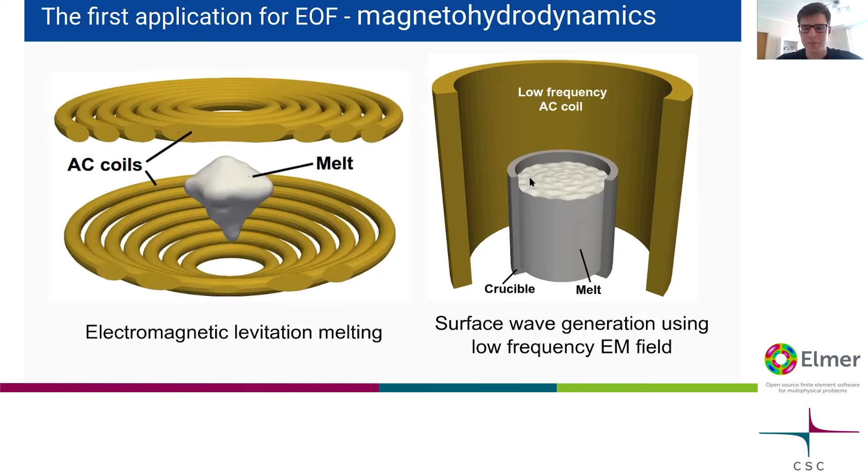When this goal was set, to simulate those types of problems, it was kind of clear what was needed. From a fluid dynamics viewpoint, we might have very high Reynolds numbers, particularly in that levitating case. As you also saw before in the pictures, liquid metal applications very often have a free surface, so there needed to be some method to cope with that as well.

And different material properties that are dependent on temperature, like viscosity in the liquid metal case. On the electromagnetics side, almost all problems are solved in 3 dimensions, including eddy currents. For that, the AV formulation is probably one of the best currently available.

Conductivity dependence on temperature: liquid metals, once they melt, have temperature-dependent conductivity. And the term V cross B is basically the currents generated when a fluid with velocity V moves along a magnetic field B. So there are additional currents and forces involved when such liquid metal flows in a magnetic field, and those currents need to be considered when solving electromagnetics.

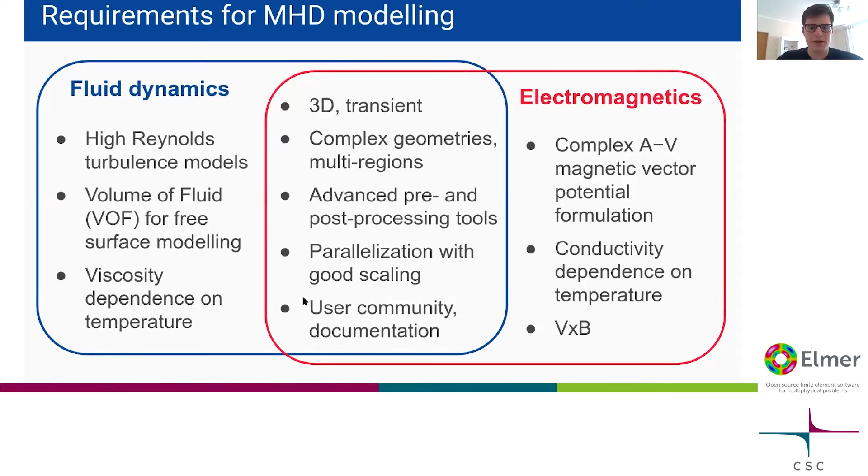What's common for fluid dynamics and electromagnetics: almost all problems are 3D transient with very complex geometries, and advanced pre-processing is very common, like generating complex meshes. Problems are quite large and difficult to solve, so parallelization is very important. And at the time when I started, user support and community were very important to me to consider, because there was no one else who could help me or direct me in which direction to move. So it's good to get pieces of information from other people.

At the beginning, it was clear that the right tools to simulate MHD problems were OpenFOAM and Elmer, because OpenFOAM is the most popular open source CFD software, and it has the capability to model high turbulence flows, and also has volume of fluid methods for solving flows with free surfaces. So that was a nice feature.

On the other hand, Elmer at that time when I started was quite capable to solve electromagnetic problems. Now it's much better than it was 4 years ago, but at that time it was enough for me. And what unites both softwares is that they are highly parallel software packages using the message passing interface to decompose and communicate between different processors across distributed data.

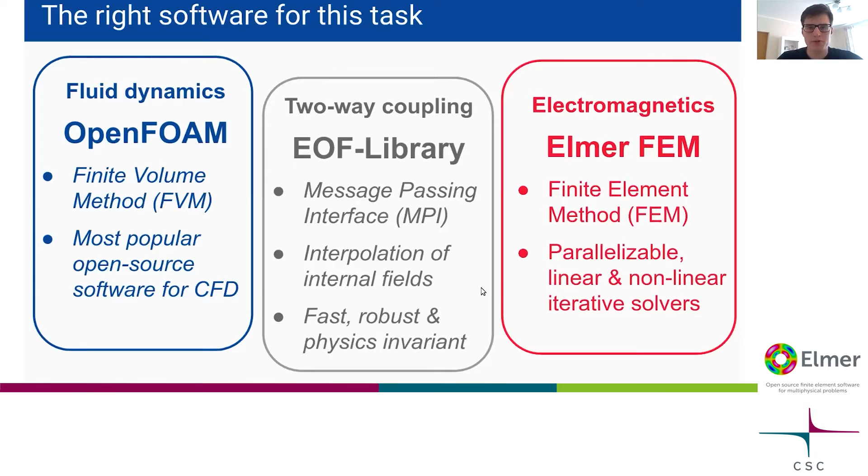What else I found was that both OpenFOAM and Elmer have quite good interpolation features that allow interpolating data from one mesh to another mesh. And both software packages are quite mature and robust, which was a big thing for me.

It would be easiest to implement such coupling between OpenFOAM and Elmer in an old-fashioned way: just write everything in files, and another software opens and reads the files. Some researchers did it this way, even coupling commercial software packages. But I consider that very primitive and very slow compared to a message passing interface approach, which allows us to transfer data between different processors and software pieces directly without storing to files. That is a big advantage.

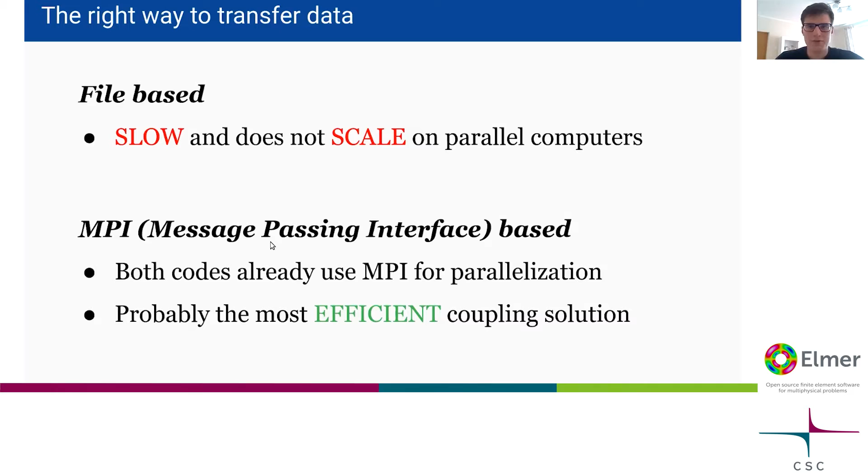So it was clear that MPI is a good choice for a highly efficient coupler needed to couple OpenFOAM and Elmer. But enough with the motivation—let's talk about applications, what this tool can do. The applications I'll show are not only my own, but also contributions from other people using this tool and moving research forward.

Quick note: from OpenFOAM side and Elmer side, there are no restrictions on which solver we can couple. The only limitation is that we can couple volumetrically—I'll explain what that means later. From OpenFOAM side, we can easily use solvers involving different media like liquid, gases, particles, and Lagrangian particle tracking. From Elmer's side, I've used solvers involving induction microwaves and different steady state and transient electromagnetics. I haven't tried acoustics, but I'm sure this coupling can be used for aeroacoustics too. Both softwares together can also solve heat and different parametric dependence.

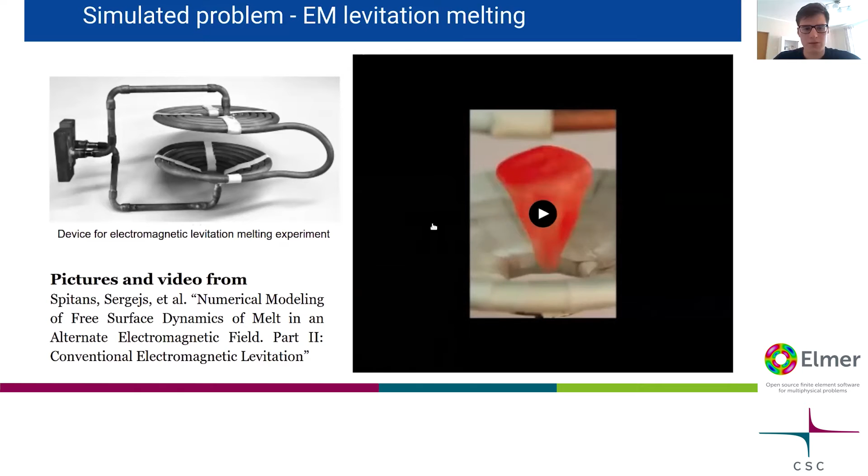What you see here is that he puts a small sphere of aluminum between two coils, then turns on current in those coils, and the liquid metal melts. As you can see, it starts rotating—very interesting how this metal behaves.

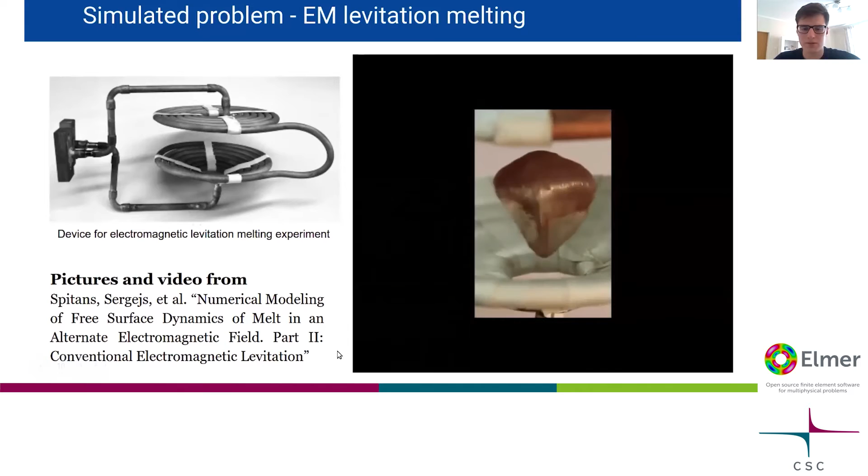My attempt to simulate this problem was as follows: it was a 3D problem. Here you see the sketch of geometry. At the beginning we have aluminum melt—actually it started as melt, I didn't start from solid. And we have coils. The OpenFOAM mesh is smaller than the Elmer mesh.

This OpenFOAM region corresponds to this internal region in Elmer. Because magnetic fields need to be closed somehow, the domain for electromagnetics is typically larger when we couple Elmer and OpenFOAM. For OpenFOAM, boundary conditions were quite simple—it was atmosphere, just pressure and velocity driven boundary conditions, so fluid can exit if needed, and gas can easily flow inside and outside this domain.

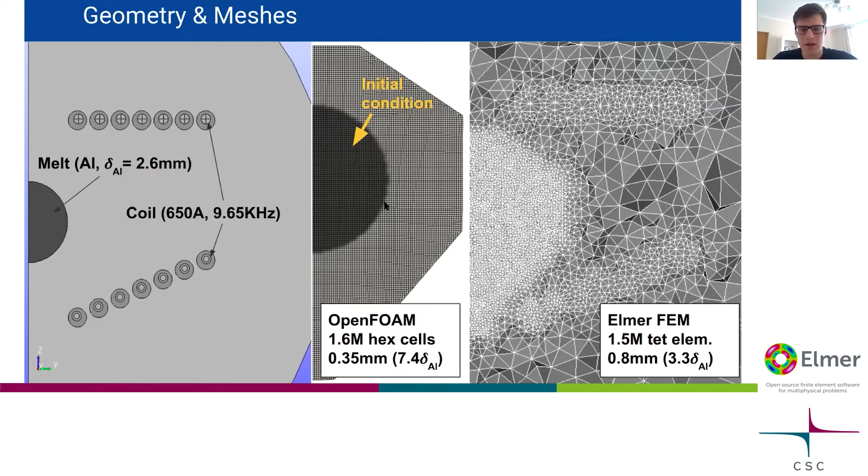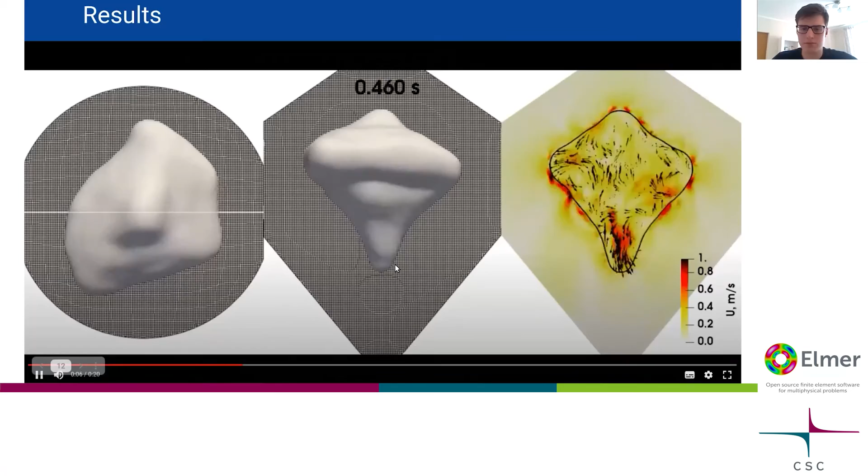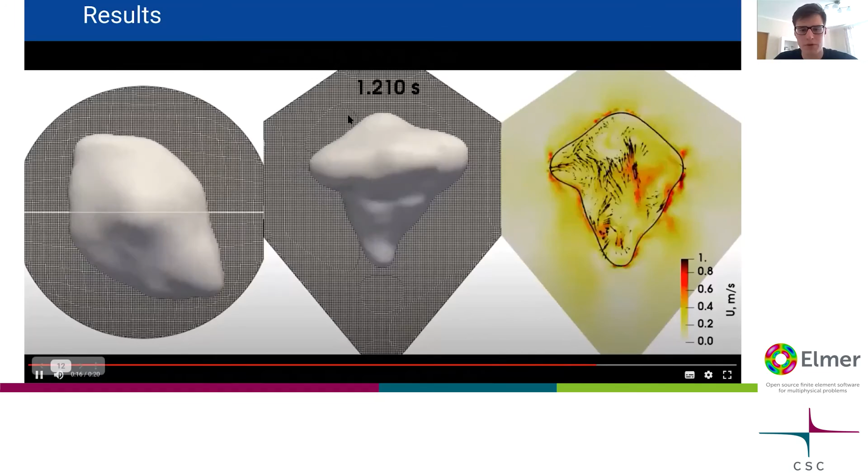Simulation results from the top, from the side, and velocity distribution show that the flow is very complex. This problem was solved over about 2 weeks on a 16 core computer with 64 gigabytes of memory. Basically it worked repetitively: OpenFOAM did a couple iterations, then updated the electromagnetic field according to the shape of the liquid metal, and then did OpenFOAM simulation again.

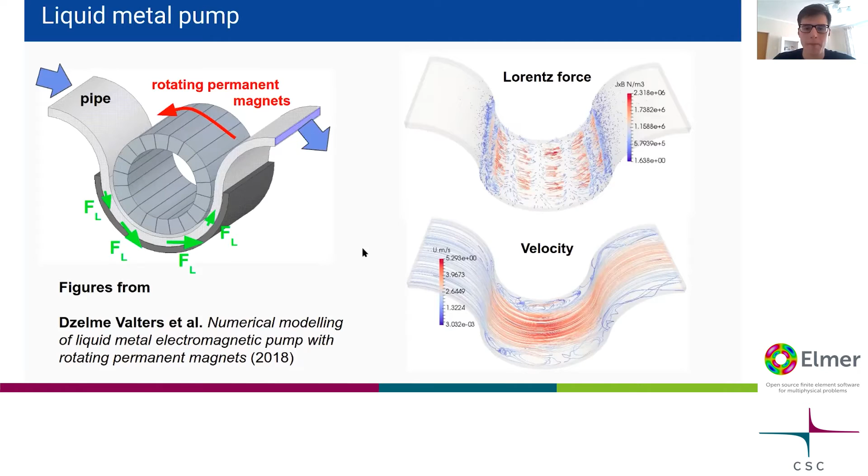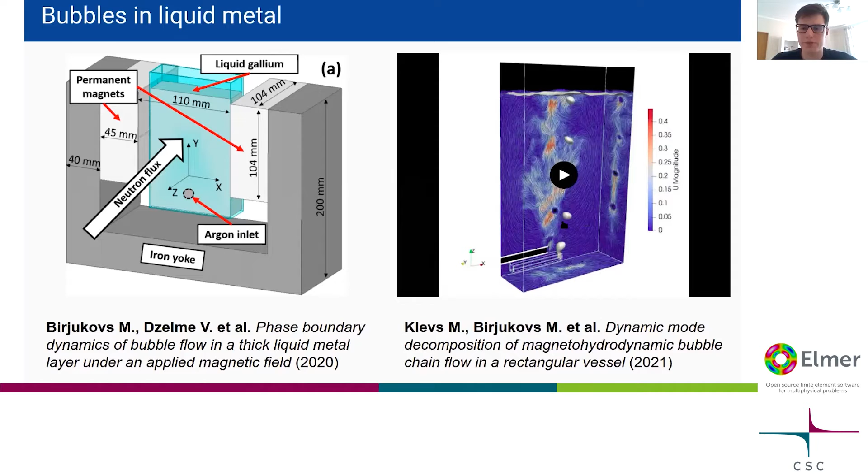So when bubbles are going up, if there is no magnetic field, they have a larger spread - they're kind of oscillating. When a magnetic field is introduced, their trajectories become smoother. They go almost directly up.

There are also other applications of this library. There was one research article made by researchers from, I guess, Thailand - you can check it if you want. They have a magnetic microwave generating device with waveguides, and in the middle they put a bucket with water, with microwaves hitting this water from the top.

In this video we see my simulation. We have the electromagnetic field, heat distribution in water, and velocity field. On the top we have the Marangoni effect - surface tension dependence on temperature and temperature distribution.

So again we have electromagnetic properties that are dependent on temperature, and fluid dynamics properties dependent on temperature, and all those electromagnetic and fluid dynamic models need to be coupled together. We cannot solve electromagnetics independently from fluid dynamics in this case.

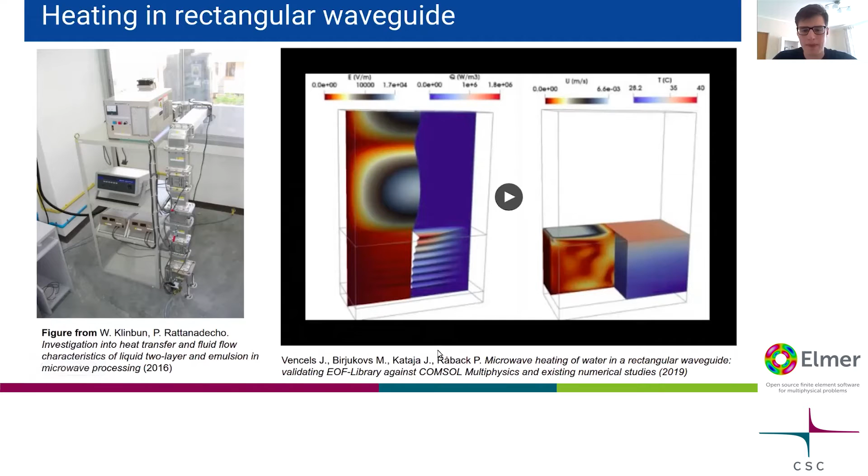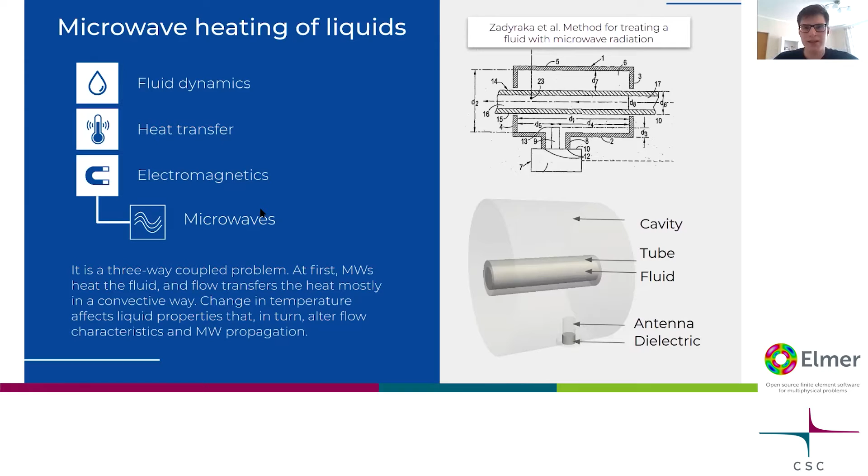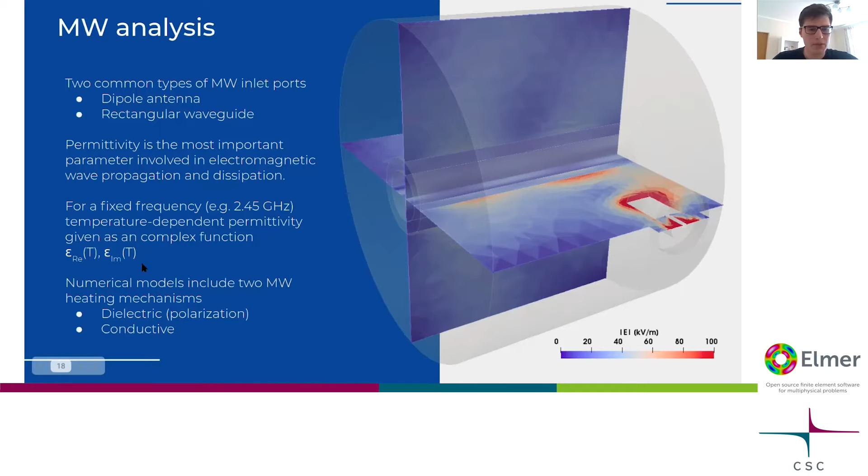It's a very interesting application because it involves temperature-dependent material properties, and this is a truly multiphysics three-way coupled problem. For electromagnetics we have permittivity dependence on temperature, and for fluid dynamics we have viscosity, density, and thermal conductivity dependence on temperature.

It's very interesting that there are not many commercial software packages that could do this microwave and fluid dynamics coupling, especially for highly turbulent flows. So this is a kind of interesting application.

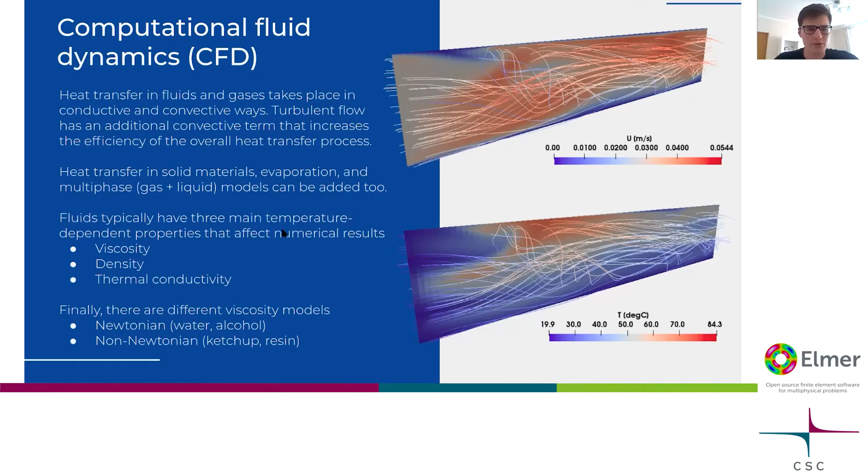Another direction in which EOF-Library developers like me and other users were looking was different cooling applications of electrical devices, like, for example, electrical motors.

Inside this nice looking electrical car made by Nissan, there is an electrical heart made from aluminum - this is the electrical motor. The electrical motor has a liquid cooling jacket from outside, and inside that jacket there are places where fluid flows and removes excess heat from the motor.

What's interesting is that for copper, electrical resistivity is quite dependent on temperature. Increasing temperature by 60 degrees, we may have a 24% increase in losses because resistivity gets larger. So it's quite important for electrical devices to consider temperature effects, not only on efficiency, but also on reliability - whether we have hotspots.

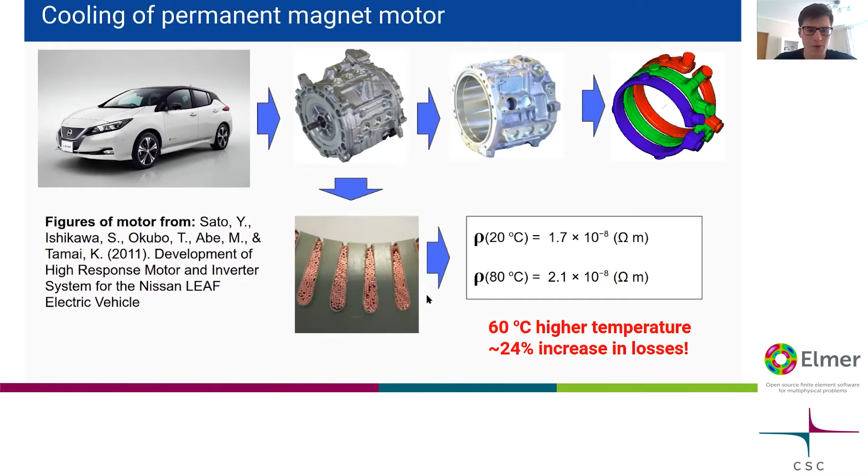It was a very basic model developed just for testing purposes by me, then Janne Keränen and Aku Karvinen from VTT. The idea was to take a very basic electromagnetic stator part, the outer part from the electrical motor where currents flow, considering that most heat is generated in that outer part of the motor.

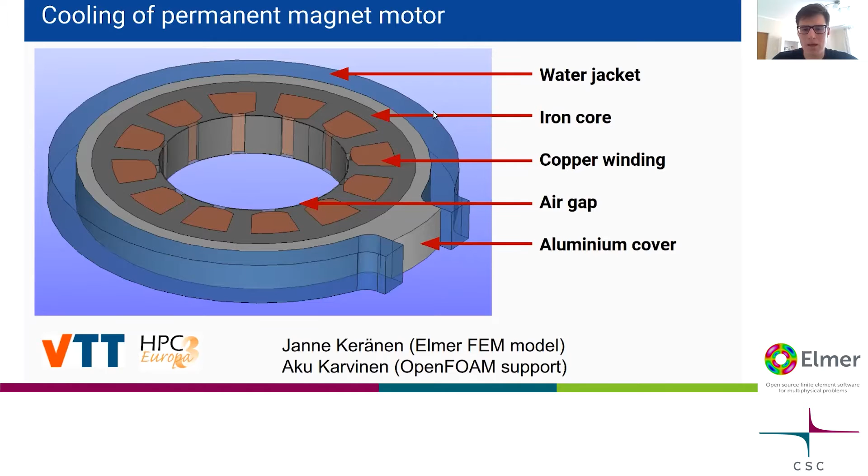Then we have aluminum and a water jacket that cools this motor. It was possible to couple OpenFOAM's conjugate heat transfer solver with Elmer's electromagnetic solver: OpenFOAM receives Joule heat from Elmer, and Elmer receives temperature from OpenFOAM. So we have two-way coupling, and we're able to reach a very accurate steady state by updating temperature and Joule losses iteratively.

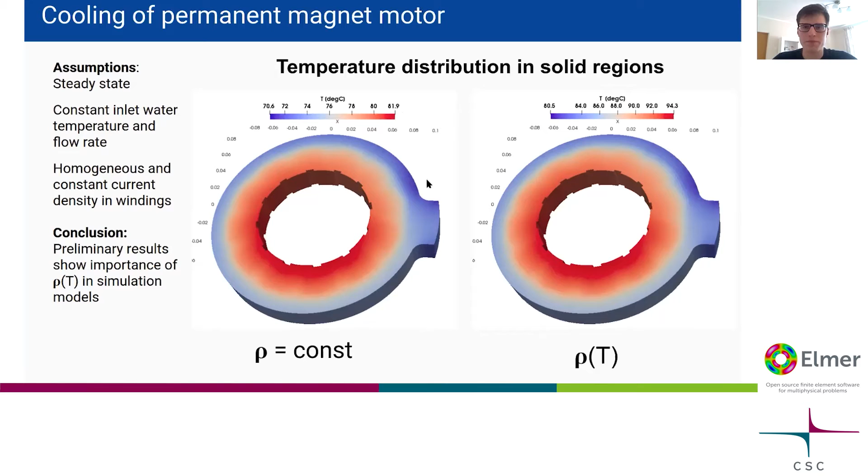And it was found that considering resistivity dependence on temperature plays an important role in these electrical heating applications.

And of course, there's one more case to demonstrate to you, also one of my favorites, because there is a Czech company, PlasmaSolve, who are doing plasma physics simulations. They have quite a substantial tool set to solve plasmas in different regimes.

Those familiar with plasmas know that different methods are applicable only in very narrow plasma regimes. They built their simulation tools on OpenFOAM DSMC models, Lagrangian particle tracking models, and of course using Elmer's electromagnetic capabilities. If you're interested, I suggest you go to their webpage and take a look at the nice simulation work they've already done, and how smart those guys are.

Yeah, so let's talk about how this EOF-Library works, what it can do and what it cannot do.

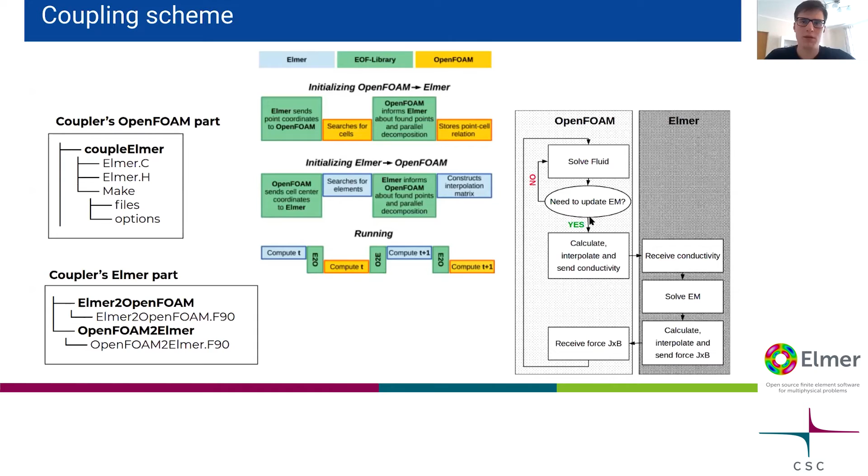In the code, this coupling or data transfer looks as follows. On the OpenFOAM side, somewhere in the code, we have an MPI receive command, and on the Elmer side, in the Elmer library, there should be a corresponding MPI send command. So for every receive on the OpenFOAM side, there's a send on the Elmer side.

When we want to send from Elmer to OpenFOAM, in the software it looks as follows: we enter this code, it selects a variable that needs to be communicated, then it applies the interpolation matrix, here called apply projector, which does the interpolation and sends data to OpenFOAM.

On the OpenFOAM side, it was waiting until the message from Elmer arrives. Once this message is received, OpenFOAM receives it and continues with the simulation. So it's quite simple.

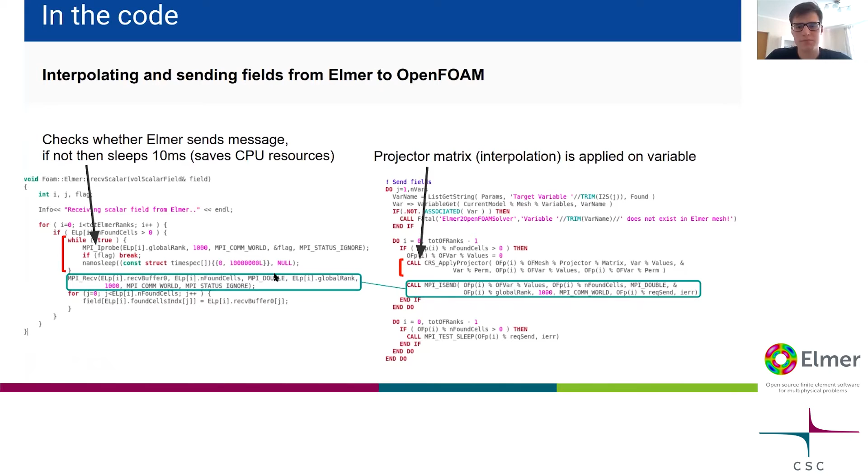Both softwares, Elmer and OpenFOAM, are run simultaneously. We use this mpirun kind of wrapper for parallel applications that specifies the number of Elmer cores we want to run. For Elmer, it can start from one core - there is no limit how much we can maximum use. Then we put a colon and specify how many cores we want for OpenFOAM. For OpenFOAM, we cannot use less than 2 cores - it's just hard-coded.

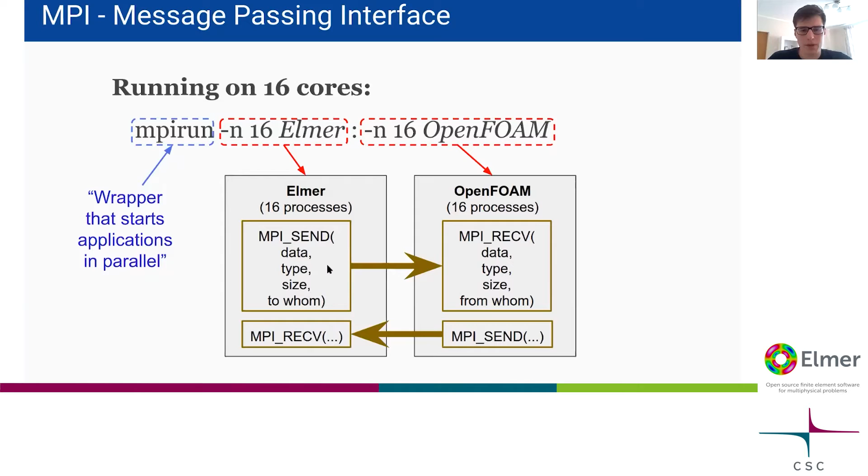A case running on 16 cores would look as following. Although it will run 16 applications of Elmer and 16 applications of OpenFOAM, it will utilize only 16 physical cores on the computer, because while OpenFOAM is calculating, Elmer is waiting, and then they just switch. So we reuse computational resources quite efficiently. For every MPI send, there is an MPI receive on the OpenFOAM side and vice versa.

Quite important for those doing research is how accurate and powerful this library is. To do this analysis, a few years ago I did a unit cube test. You can find a research article describing it in more detail, also describing different interpolation strategies and algorithms - it starts with EOF-Library. In short, it was tested with 3 different sizes of unit cubes. There was a distribution initialized, and we measured the relative error depending on mesh size.

What we found is that when interpolating from Elmer to OpenFOAM, reducing mesh size twice reduces error almost 4 times - so this accuracy from Elmer to OpenFOAM is almost second order. When interpolating from OpenFOAM to Elmer, this accuracy is worse, slightly above linear accuracy - making the mesh 2 times finer gives slightly more than 2 times more accuracy.

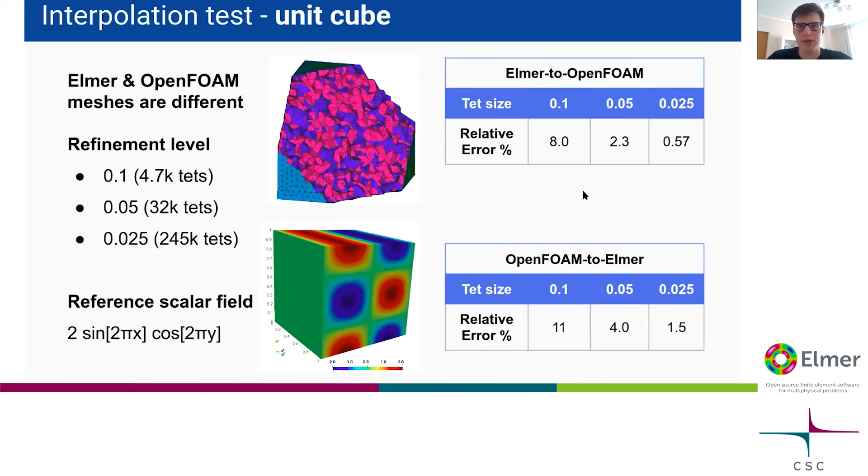Of course, if we consider that this mesh can be refined even more, we get closer to zero. From a performance viewpoint, a quite large unit cube simulation was run as a strong scaling test - this unit cube mesh size was fixed, but only the core number was changed. We were interested in the time to initialize this coupling functionality from OpenFOAM to Elmer and vice versa, and how much time it takes during runtime to communicate, interpolate and communicate those fields.

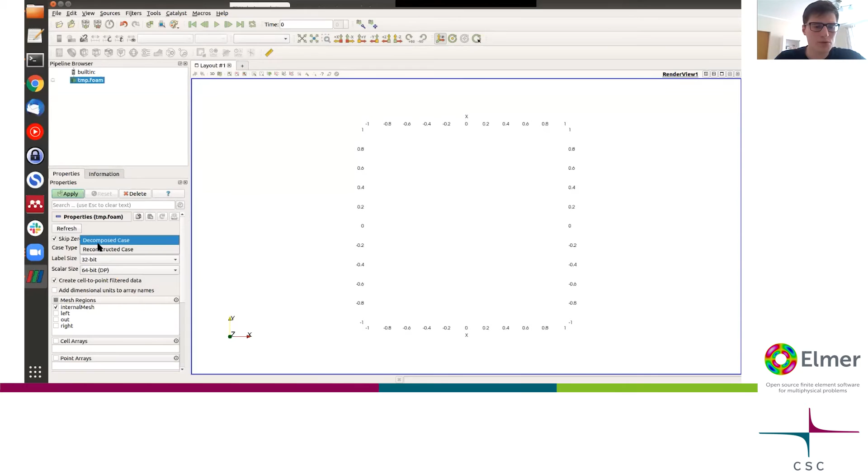Then we create a temporary file for OpenFOAM and can visualize results even while the simulation is running. So we will open the OpenFOAM file where the solution is decomposed, and we select the decomposed case. What we see here is, for example, J cross B is the force that has been sent from Elmer to OpenFOAM, so it is kind of dynamic.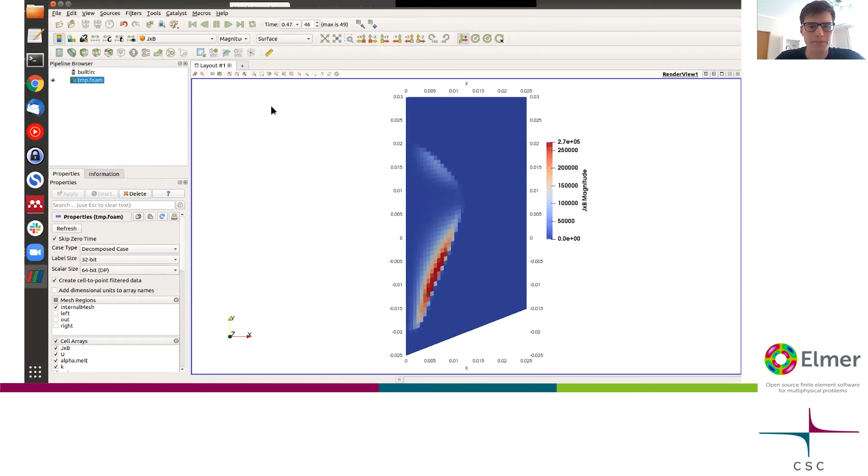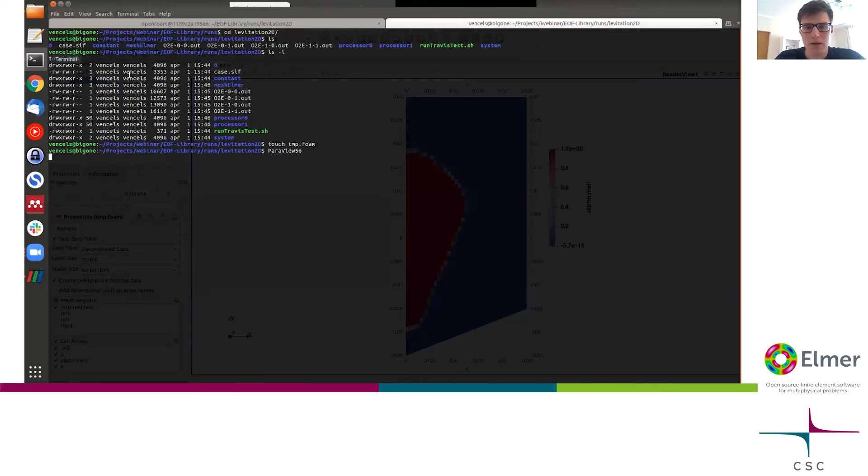Alpha melt corresponds to the liquid phase of the fluid. I guess our simulation is already done - it took only about 53 seconds to compute this problem, so it's quite fast. We will open also the results for Elmer.

For Elmer, we go to the mesh directory, and you can see that the Elmer results are decomposed. So we open PVTU, and here it is - as I told before, the Elmer domain is larger than the OpenFOAM domain.

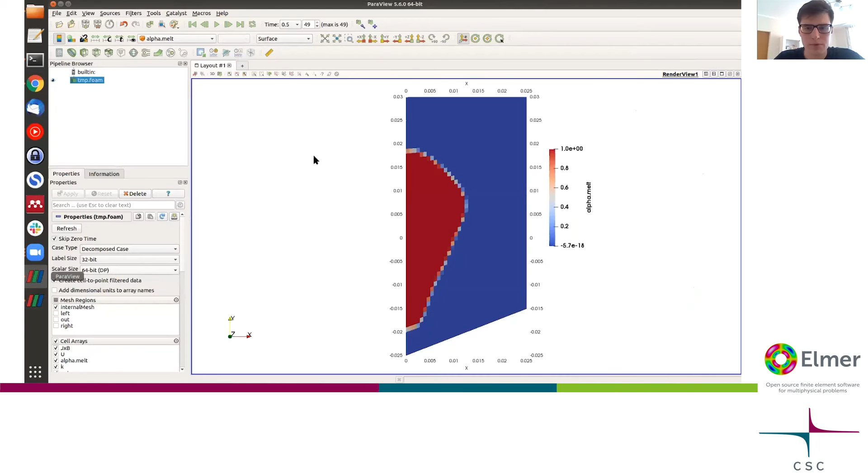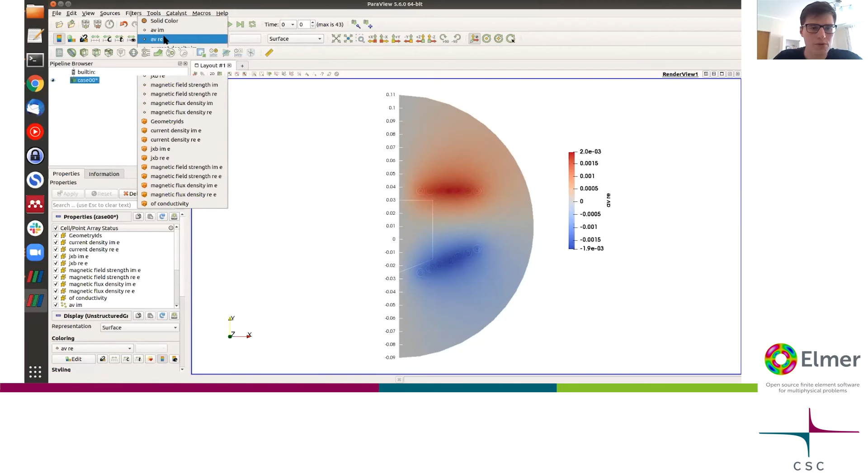Let's take a look side by side. So OpenFOAM corresponds to this internal part in Elmer, kind of the body, what that is inside Elmer's computational domain. And if we look on fields, then J cross B, real part of J cross B, is that value, that distribution that was sent to OpenFOAM.

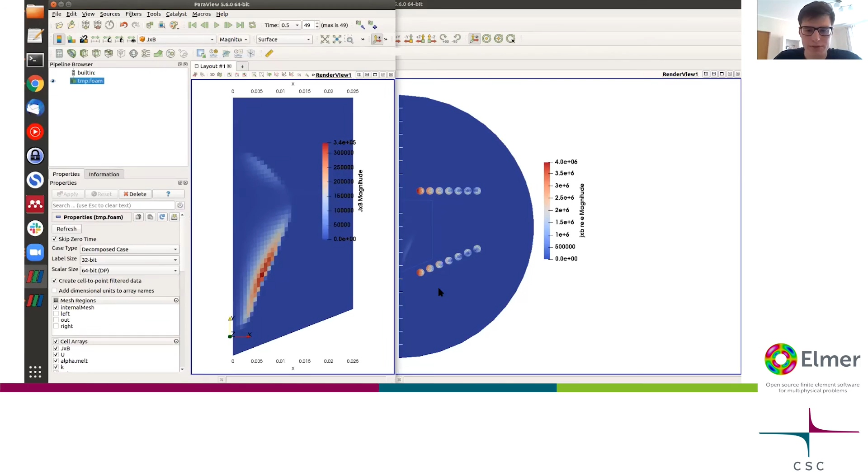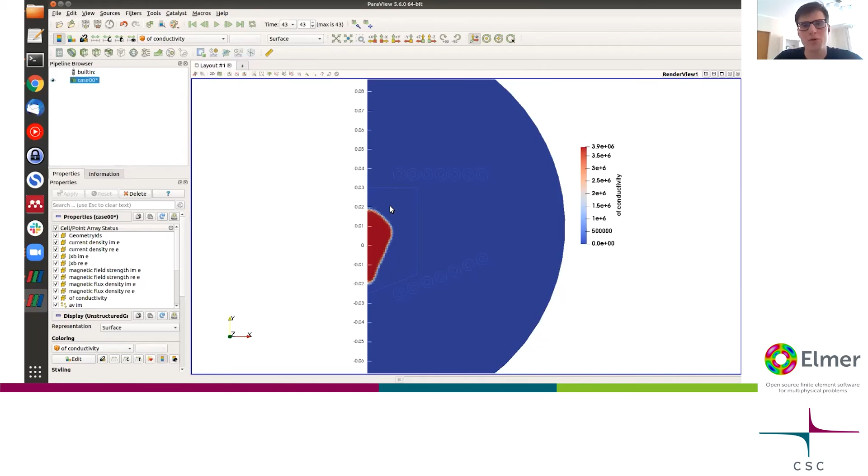This is that value that was interpolated and sent to OpenFOAM. Here it is. And OpenFOAM sent to Elmer conductivity. Conductivity was equal to liquid phase multiplied by conductivity of liquid metal. So we can take a look that when Elmer did computation, then inside this region, it had this material with non-homogeneous conductivity.

So that's, very quickly, about how to use the software and how to modify it. So inside the library folder, pretty much you will not need to touch anything. What you will need to do is modify solvers yourself. So basically you will take a solver from OpenFOAM and do some modifications. We can take a look, for example, on this MHD interFOAM.

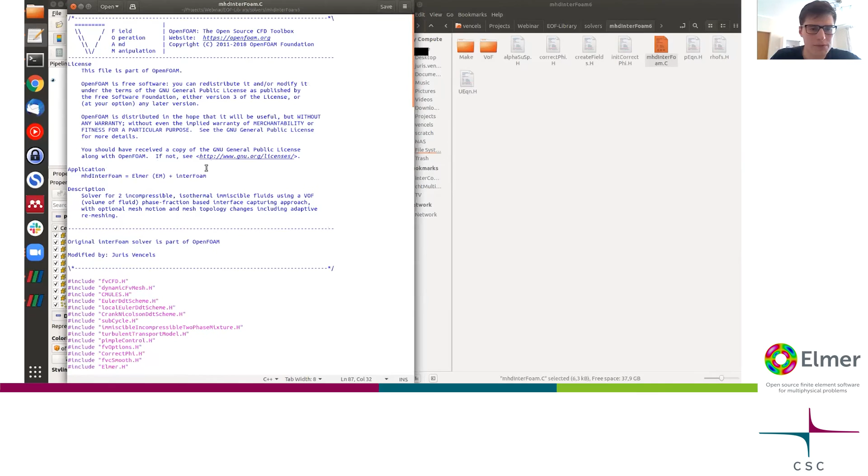At the beginning of this file, if you compare with default interFOAM, you will see that these files are very, very similar. But the difference is that at the top we have this Elmer.h added, so that we access functionality. And at the beginning of the simulation, we have initialization of functionality for sending fields to Elmer, from OpenFOAM to Elmer, and initializing functionality to receive from Elmer to OpenFOAM.

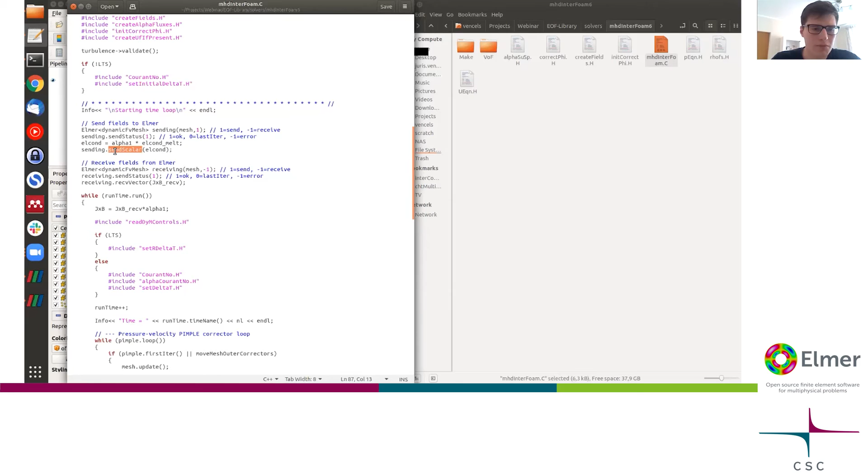So basically what we do is we are creating a C++ class that holds all information about how those meshes need to be interpolated. Here we initialize that class, and the sending corresponds to sending from OpenFOAM to Elmer - we send a scalar, similarly a vector can be sent, and we provide that variable that we want to send. Similarly for receiving class, we have receive vector, and this is that vector that will be received from Elmer to OpenFOAM.

And if we open the test case that I showed you before, the SIF file for Elmer, you will find that we have corresponding Solver 1, which is OpenFOAM to Elmer. And when Elmer steps on this solver, it knows that OpenFOAM will send one variable, and here this is that variable, corresponding variable in the same order. This variable, electrical conductivity, is going to correspond to OF conductivity in Elmer. Then Elmer does computation, computes magnetic fields, currents, and reaches solver number 4.

And solver number 4 is Elmer to OpenFOAM. And here we have 3 variables, corresponding to 3 vector dimensions of the J cross B real part variable. So we are not specifying the vector as a whole here, but by components. And it will send by components to OpenFOAM.

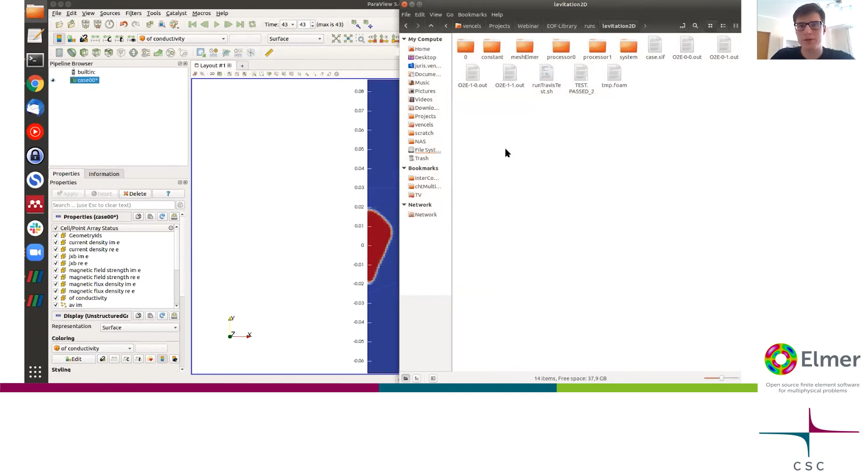So as you can see, on the Elmer side you don't need to modify anything, just add solvers. And for OpenFOAM, you will need to modify solvers yourself. But other than that, there is not such a big complexity once you learn how to use both software packages. That's pretty much everything I wanted to tell. So thank you, and let's discuss questions then.

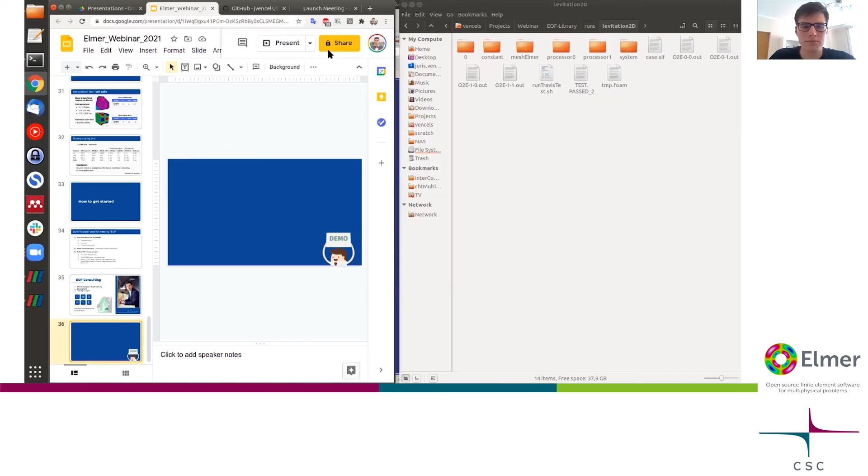We have at least some questions from Christian Schubert. I think they may not be totally related to EOF-Library. Are there any plans for implementation of volume conservative property interpolation in the future, for example for Joule heating? Difficult question. I think all development that happens with this library will be based on some projects and project funding. So the question is simple: if there is some interest, and also involving some funding, then I'm more than interested. But if there is none, then EOF-Library currently, at least for those problems that I am solving, solves most of the problems. I guess in order to have that, we should know, on Elmer's side, the finite volume elements or their shapes. Now we only know the cell centers, so it's not easily doable currently.